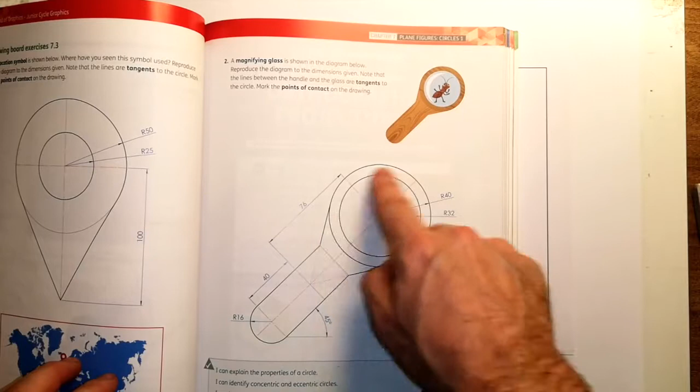So here we have a nice little bit of a drawing here with a couple of tangents. So the main thing, circles, fairly straightforward, and it's these tangents that we really want to see the constructions on, okay? And if you ever see this kind of thing with the same mark at the points of contact, we need to show the constructions to do all the tangents.

Right, I'm going to do this one reasonably fast, mainly because it's 8:30 at night, but also you can pause the video as you go along, see what it is. It's a nice chance to look at how to use your instruments and make this easier.

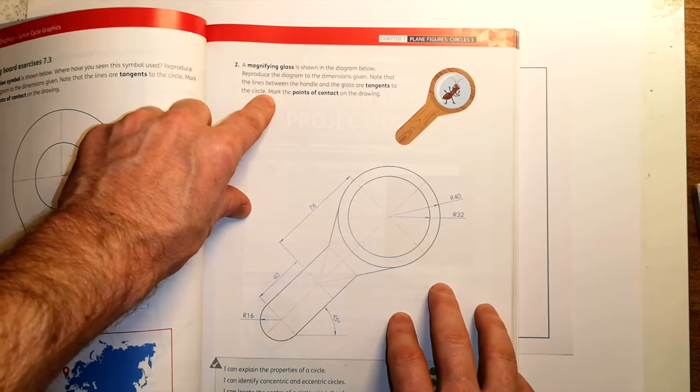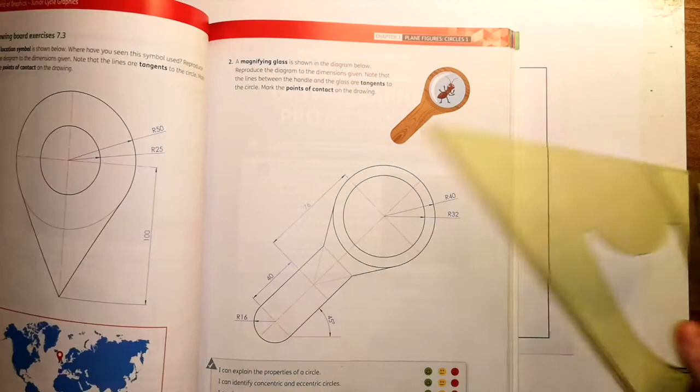Now, good tip to start off is you can see these red center lines. I'm going to draw these in initially because they'll help give a whole lot of structure to the drawing. They're at 45 degrees, so I can draw them all using my 45-degree set square. Right, okay, so this is page 105. I'll write that on the drawing as we get into it, and I'll move this back and forth so you can keep an eye on it.

Okay, now pop that there. This is just to focus the camera. Don't worry, that's not what we need to do today.

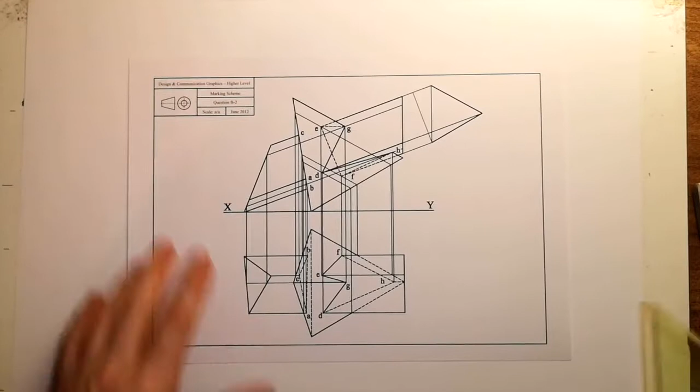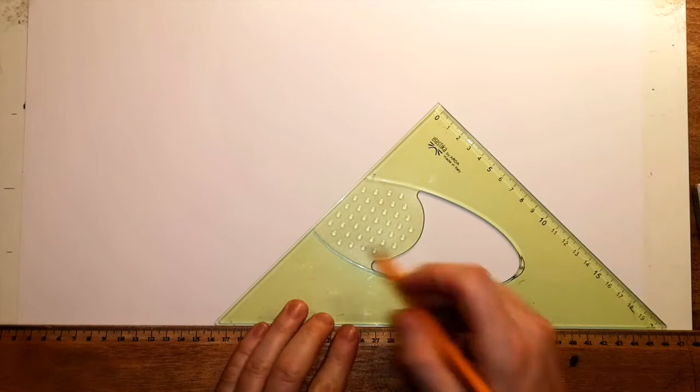Right, so 45-degree line. Again, of course, a bit longer, you can just slide it up. Now, we are going to choose a starting point. So let's just start it here. That is the top circle. Now, these are nice and light for your constructions. I'm doing a little bit dark to help you out.

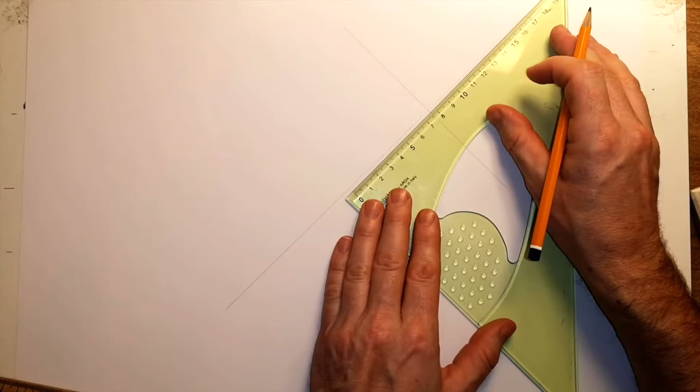We know that we're going to be 76 down along this. So there we go. Measure that 76. Little mark. Okay. And we know we're going to go a further 40 down along that again. There we go. And see the way we can just draw this little cross for the lower circle. So that's where the upper circle is going to be. That's the lower one. Now, much easier to find that point than to try and draw that afterwards.

So what we'll do is let's get the easy stuff we can do. We'll start with the easiest one, which is the biggest circle. All right, and the top one up here is radius 40. So we'll set that up. Again, make sure you're not confusing your diameters and your radiuses. That's where it begins to look weird on the page. There we are, radius 40.

And I can look at the drawing, and that's going to be a full heavy circle the whole way around. So I can go in and draw that heavy with a couple little passes of the compass. You get it nice and heavy. There's a 32mm circle in the center of that. So we'll drop this to 32. There we go.

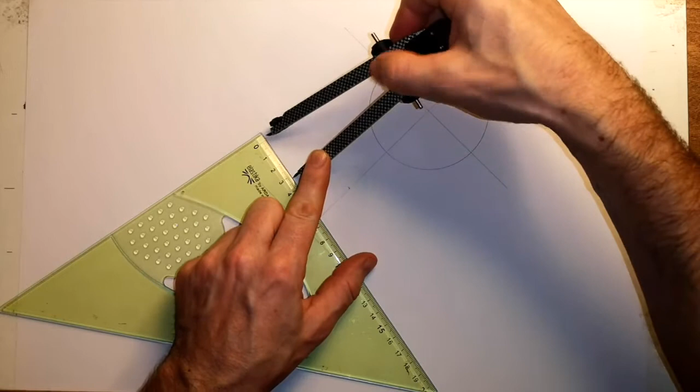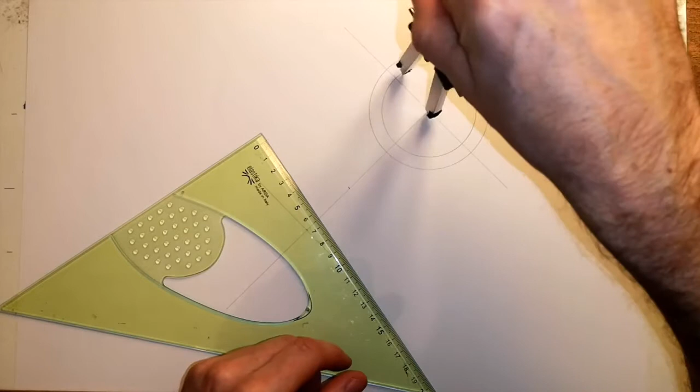Now again, I'm only holding the compass at the top here. I can see from the drawing that's going to be the same the whole way around. If it does a little hop like that, just put it back in. And there we go. A tip to stop it hopping out is do it at a bit of an angle. If it's straight up, it really wants to walk out. But if it's at an angle, it's harder to do that.

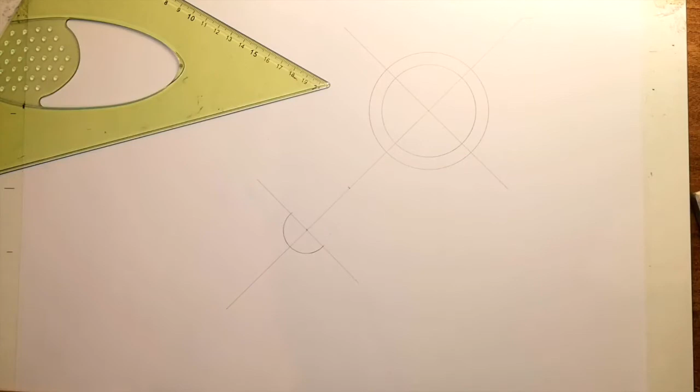Okay, let's do our lower circle here, 16. 16, this is going to be a little bit more annoying. So we started with the nice ones. And I can see that that's going to stop at the line there. And I'm just holding the pin in place to stop it hopping, because on the smaller ones it is a bit harder. Okay, I am going to have a tangent to that point, so I can't do this until I get my tangent in place.

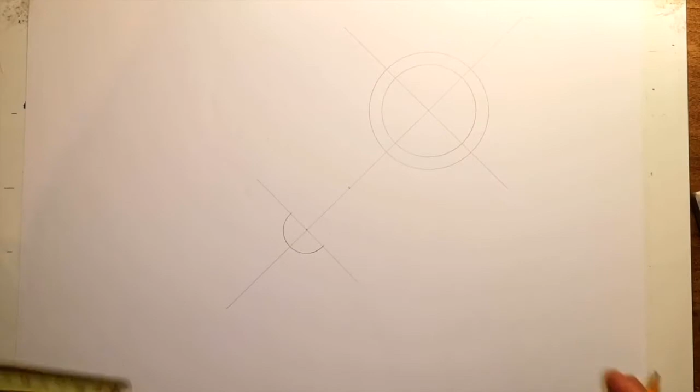Right, time to draw a tangent. Okay, so I want to check we're nice and clearly on camera. I'm actually going to bring the camera down a little bit to make this easier to see. Okay, and we'll just fix our focus there. There you go. We have a better look at this now.

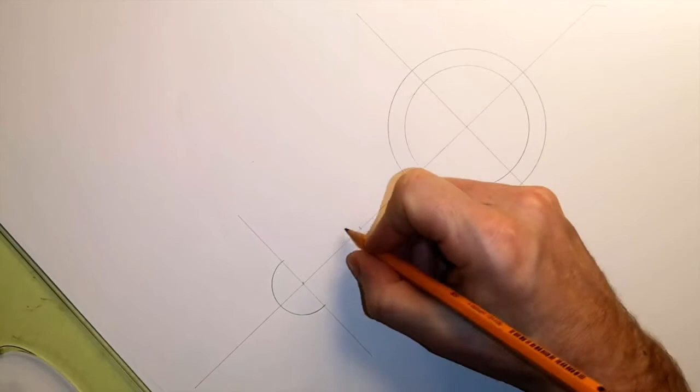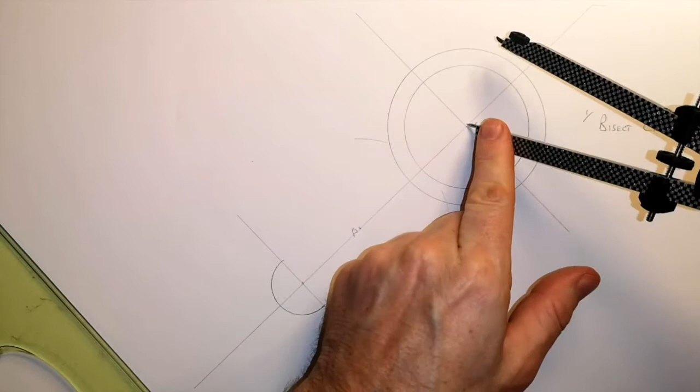Okay, step one is to find the center from these two here. So we'll call this point P, and that's C, which is the center of the circle. So step one is bisect C to P. Grand. Take your compass, a bit bigger than half. And there we go. You can draw it like this, or you can draw it the whole way along. Doesn't really matter. And there we go. There's my two contact points. Fantastic. So there's the center.

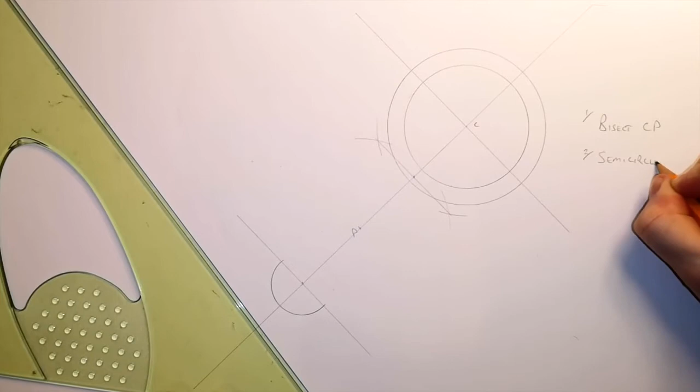Now, two is the semicircle. Of course, I'm using this as our center. We'll set the compass down to P. Just double check you're on to C. Yeah, that's fine. So we're on the right track. And we're going to have to draw this the whole way around because I need the tangent on both sides.

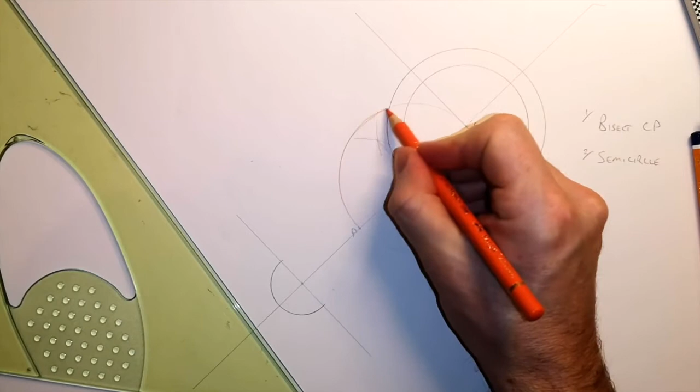Now, I'm just going to take a moment and sketch this in orange. You don't need to do this, but this is just so we can see the tangent construction separate to the main drawing. If you are doing this, it's nice practice for your freehand. So I'm just following the nice light construction line. I can't draw my construction lines light because you won't see them, but you're going to draw them amazingly light and beautiful with your brand new 2H pencils, those of you who went out and got them.

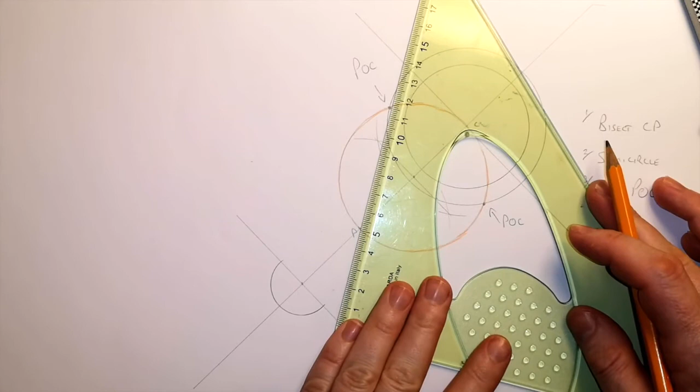Okay, what does that give me? That gives me my points of contact. POC, point of contact. Okay, 3. Find points of contact. Right, well, there we go. Connect P to the point of contact, that's our tangent. You can kind of see that that would quite nicely touch the circle just once. Now I need to do this as a construction because it's going to disappear somewhere in there. Mine's a dark construction. So 4 is draw the tangent.

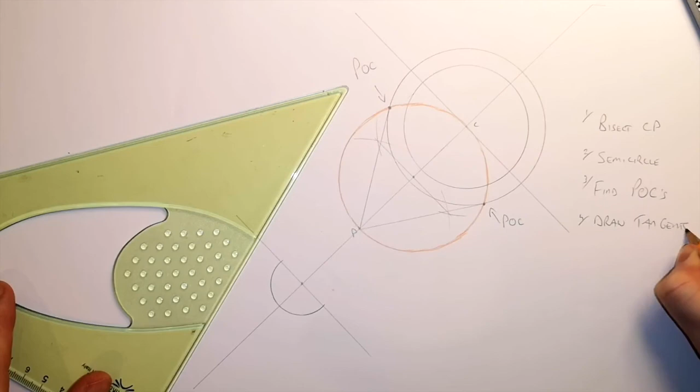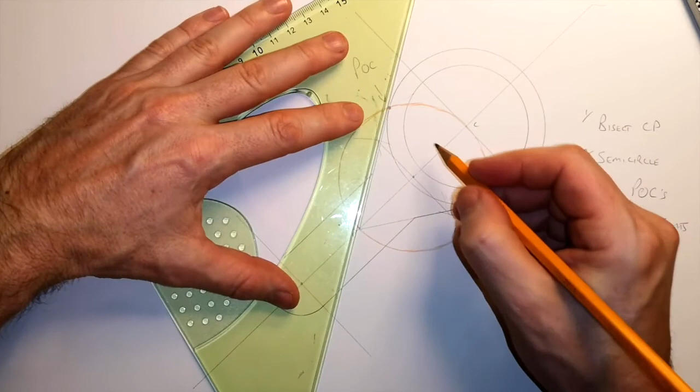Not too bad. These guys here, here's how we're going to do these ones. We can just continue up along here. Use my 45 until there. Do the same here. Nice and handy. And we'll heavy in this part of it. So, a cool little magnifying glass. And that's us done.